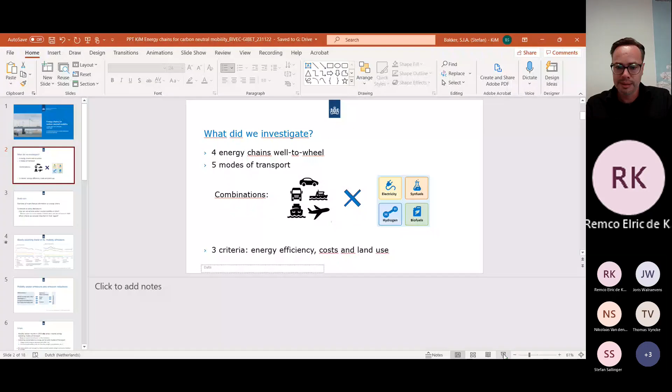We just tested how to share. Teams is a little bit new for me, so this is not the one that I want to share, I guess. So if you, yes, the presentation is there. Okay, is it perfectly visible? All right, that is fine. It's always a challenge. Online presenting is, of course, a very different experience.

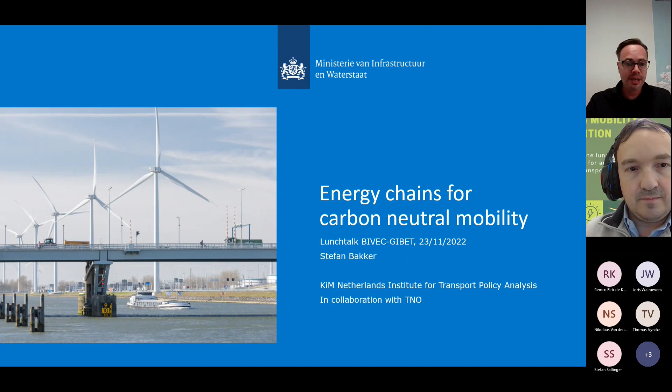But I'm happy to present some research we did in the past year together with my colleagues from the Netherlands Institute for Transport Policy Analysis. In Dutch, the abbreviation is KIM. This is an independent institute within the Ministry of Infrastructure and Water Management in the Netherlands, and we did this in collaboration with TNO. So this is quite a general, a very overview kind of research. We did it to really look into what are we talking about when we are looking at energy chains for mobility.

And we looked at 4 energy chains: electricity, synthetic fuels, hydrogen, and biofuels. And we included 5 modes of transport into that, and so also the combination of those energy chains with those 5 modes of transport. And then we looked at 3 criteria: energy efficiency, costs, and land use. And this is mostly for the Netherlands, but I think many of the results will be in a certain way also applicable to other countries.

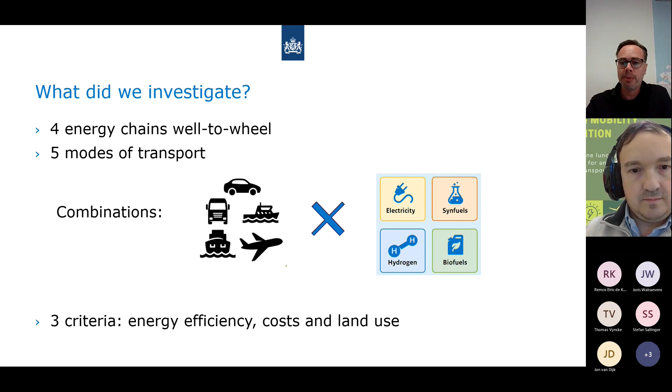The main aim of this study was to really look at recent information, really look at the facts, what is there in existing literature on the energy chains, and contribute, of course, to policy discussions, because the research that our institute does is always at the request of policymakers. So it's always directly relevant to policy. The ministry has a vision to work towards a mobility sector with 0 emissions in 2050. This is obviously a very big challenge. So we want to contribute to the question, how can we achieve this carbon neutral mobility on time?

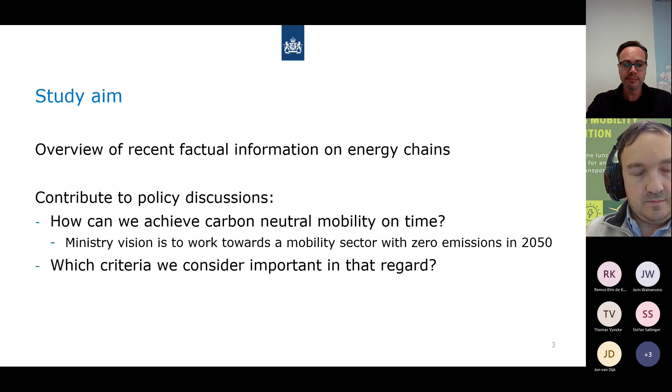And there are many ways to look at that. It's a very big energy transition, mobility transition question. And there are many choices to make in the next decade, or actually very soon. So to make those choices, what kind of criteria are important to consider when we look at this energy transition in mobility? A little bit of background.

The emissions of CO2 are slowly declining, but really only slowly in the past decade and a half, perhaps. On the left, you see the domestic mobility emissions, in which the personal cars are the biggest share, but also the freight sector, bestel- and vrachtauto's, for those who can understand that. The freight sector is also quite important, about 2/3 of the personal cars, private cars. But also, interestingly, mobile equipment is quite significant.

But if you look in a broader way, the Netherlands has a bit of an interesting position when it comes to international aviation and shipping. Rotterdam and the Schiphol airport are big bunker fuel stations, especially the Rotterdam port. So actually the emissions, if you calculate the emissions from the fuels that are bunkered for international aviation and shipping, are even higher than those of domestic emissions.

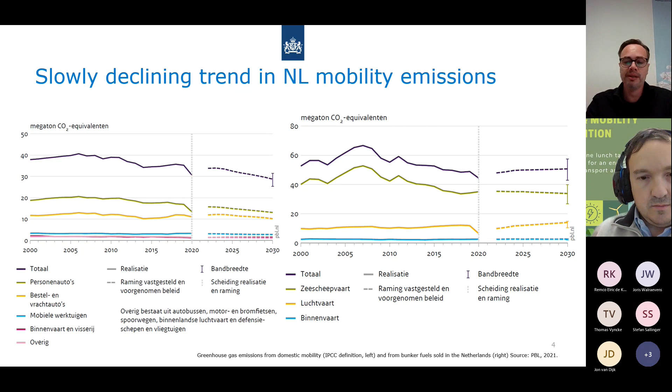These international emissions are not counted within the IPCC national accounting framework, but of course, if we want to go to a 1.5 degree scenario in the world, we have to look at international aviation and shipping as well. So therefore, we look at both domestic and international emissions from the fuel in the Netherlands, and both are very, very challenging.

One step back as well, as a framework to look at CO2 emissions in the transport sector. You can use the framework developed by Lee Schipper in the late 1990s. He described it in a way called the ASIF framework. So that is that the total emissions are the product of activity in person kilometers or ton kilometers, and then multiplied by the modal split, and then by the energy intensity, so the amount of energy per person or per ton kilometer, and finally the grams of CO2 per unit of energy.

If you look at those four parts, you can directly link those to policy options to reduce those emissions. And they can again be broken down into a framework developed in Germany in the late 1990s, but also recently taken up, becoming more popular also in the IPCC, called the Avoid, Shift, Improve framework. So Avoid looks at the activity, so the first factor of the ASIF framework, to have shorter trips or less trips, that sort of approaches.

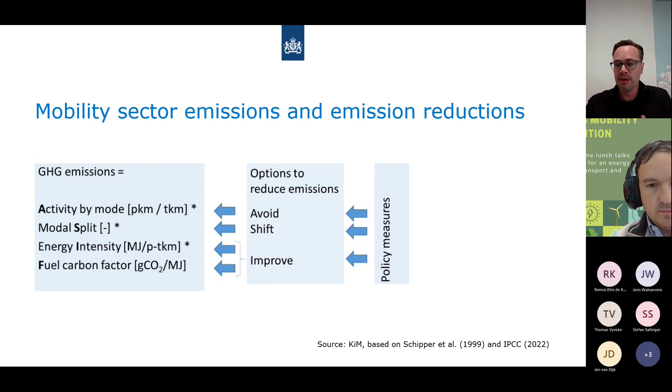Shift is to shift from one modal choice to another, so to a less energy and carbon intensive mode. And finally, the improve options, they look at only the individual modes and how can we improve the energy and carbon efficiency of that. And our study does not look at avoid and shift, only looks at the improve part. So that's a choice in the scope that we made. So in short, that means that we look at carbon neutral mobility in 2050 through carbon neutral energy chains.

The modes of transport, I didn't name them yet: the private cars and vans, we take them together. The heavy duty vehicles in road freight transport, then inland shipping, international shipping, and intercontinental aviation. So we chose those based on the total contribution to the CO2 emissions of domestic and international mobility in the Netherlands.

Then the scope can still be very large. There's many choices to make. So one thing we also did was we only considered those combinations of energy carrier and modes of transport that have a technology readiness level of 6 or more, which means that they need to be demonstrated at a large scale, at the full scale already. If they are less technologically developed, we did not consider them.

And another consideration is that they need to be practically applicable in the modes of transport. So, for instance, ammonia in road transport we did not consider. It's technically, of course, possible, but ammonia is toxic, and it's not very likely that that will happen in road transport. And for intercontinental aviation, we did not include battery electric or hydrogen, because the weight and the space of the battery or the hydrogen storage will be very, very challenging. So for short distances, this might be possible, but for intercontinental aviation, we consider this unlikely to happen.

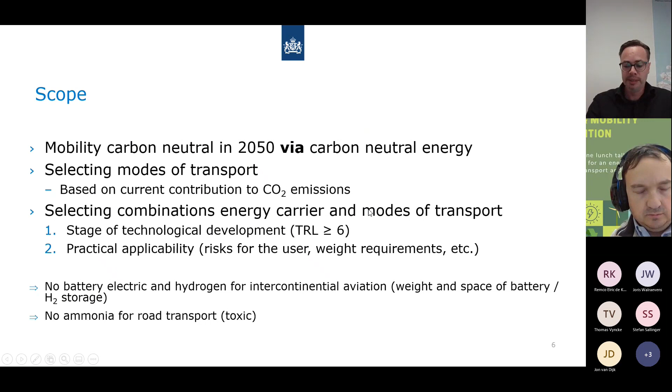One last remark about the scope. We want to explain the energy chain a little bit more in detail. We considered 4 steps. The first one is the production of the energy carrier, and also, if we talk about biofuels, it's not only the biofuel production, but also the biomass production, so the growing of the energy crops. The second stage is the transportation, the storage and the distribution of the energy carrier, so the fuel or the electricity or the hydrogen.

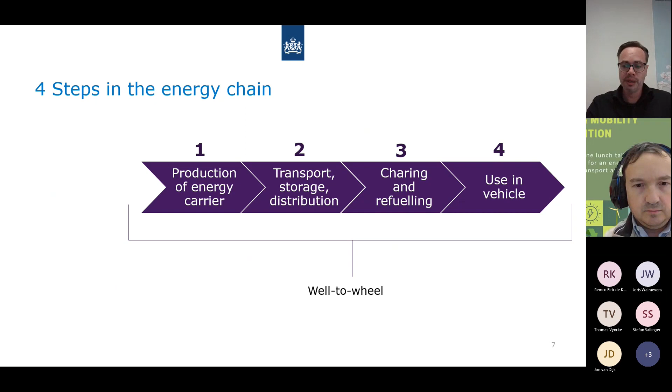The third step is the charging or the refueling of the vehicle or the vessel. And the last one is the use in the vehicle. So this is a full well-to-wheel approach. And what we did not do is a full life cycle analysis. So the production of the equipment, let's say, the production of a wind turbine or the production of a hydrogen tank, we did not include.

This is a very simple way to look at the energy chain. In reality, they are quite complex, as I will show in a bit as well. The energy chain can be quite long because energy is a global market, so they can be transported over long distances with many steps in between. They can also be bifurcated. So from certain types of biomass, you can choose to make like 4, 5, or 10 types of biofuels. So there are many subroutes in the energy chain. So we simplified them a little bit, but they're still quite complex.

They're also interlinked, and that I will show in the next slide. And of course, it's an obvious note to make, but we need to realize that mobility is only one of the energy consuming sectors. There will be competition with industry, buildings, the electricity sector. So we're looking at an energy for mobility landscape that is increasingly complex.

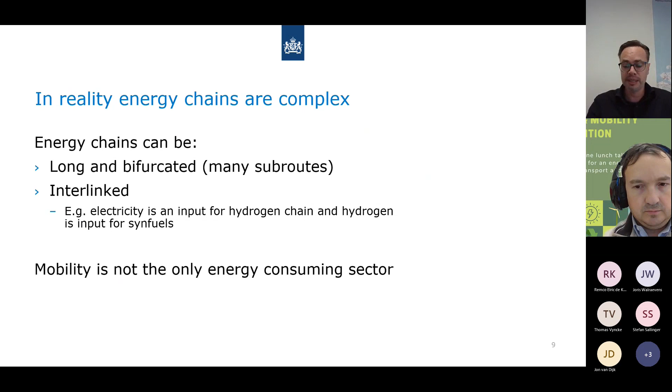To illustrate that a little bit, this is about half of the overview diagram that we use, and it's already getting a little bit interlinked. So electricity is, for instance, produced, we considered, from wind energy and solar energy. And it can obviously be directly used in vehicles, but it's also an input in green hydrogen production. And it's also used in significant amounts for the compression of the hydrogen that is already produced.

Another important note to make is that, for instance, CO2 is an input into the Fischer-Tropsch process, which is used to produce synthetic fuels. And maybe one more remark to make here is that if we look at the electricity chain on the top right, it can in the future maybe also work both ways. So you can use electricity to charge your electric vehicle, but the electric vehicle can also be used as a storage option, and be fed back into the grid when there are reasons to do so.

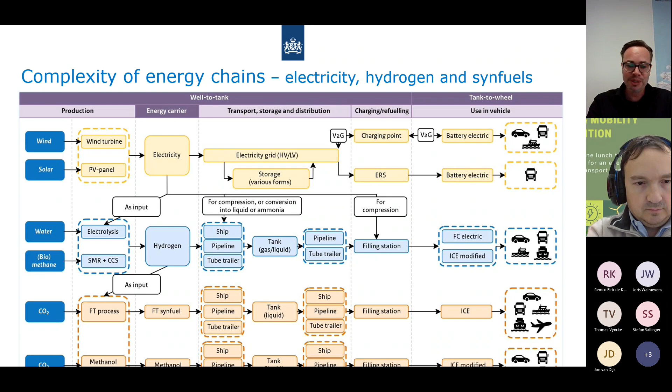When the vehicle is standing still and there is a demand in the electricity grid that can be met by these stationary batteries in the vehicles, then vehicle to grid can become a reality. So this is for illustration of three of the chains. The biofuel chain also is obviously part of it, but I will not show it here in the interest of time.

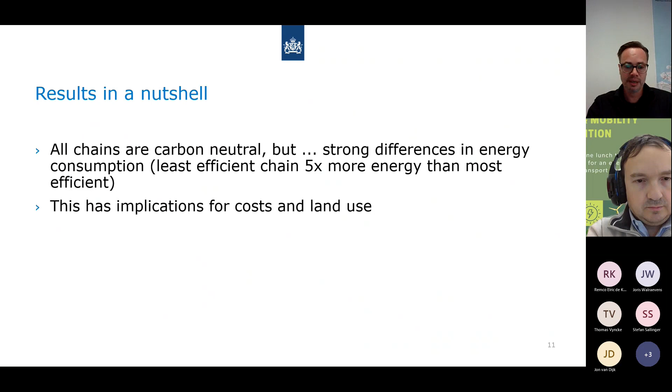Okay, so the final part is obviously the results. So in very brief, we can say all the four chains that we consider are carbon neutral or nearly carbon neutral, but there are very strong differences in the energy consumption, with the least efficient chain about 5 times more energy consuming than the most efficient chain. And this difference in energy efficiency has also strong implications for the costs and land use. And I will go into each of these three, energy, cost, and land use, in the next few slides.

So first of all, energy consumption. Here we show it in a relative way. So the most efficient chain is wind energy and a battery electric vehicle. So we consider that as a 1 and express the other chains relative to this chain. So you can see that for hydrogen, the energy consumption per kilometer will be at least twice as high, but it can also be 4 times as high, and in certain cases also more than 4 times.

The synthetic fuels. So here there are many synthetic fuels that we can consider, but for simplification, we only included the Fischer-Tropsch synthetic fuel produced with CO2 captured from the air. So that's DAC, direct air capture. And to produce that, you need even more energy than for the hydrogen chains, partially because you need hydrogen and CO2 to produce the synthetic fuel.

For biofuels, the chains are also a lot less efficient than for electricity. This is mainly because they will be used in vehicles with an internal combustion engine, basically like most of the vehicles are now, which are really inefficient compared to an electric motor, which is very efficient. And for bioethanol, there are many steps that you need in the process to produce that fuel. So also in the production process of bioethanol, a lot of energy is lost. I think this is the picture for energy efficiency.

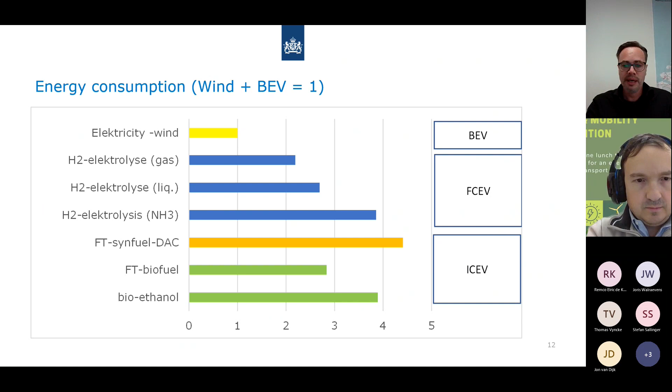And this will translate into costs to a large degree, but of course not one-to-one, which I'll explain right now. Here you can see the energy costs for the different types of fuels. The orange and the red bars, they are dominant in most of the chains. These are the material inputs that you need. So for instance, for the biofuels, the production of the biomass, and for the synthetic fuel, the costs of producing electricity and producing hydrogen. And for hydrogen, the costs of electricity. They are dominant in the biofuels and the synthetic fuels. But for hydrogen and for electricity, also the charging and the refueling steps are quite important.

Another thing that is very clear, I think, in this graph, we included uncertainty bars, the small bars, and they are quite large. So even for 2030, which is not too far in the distant future, the costs are very uncertain. And these are costs without taxes and subsidies. These are the basic costs. And of course, we can see in the markets recently that it is also very difficult to predict these costs.

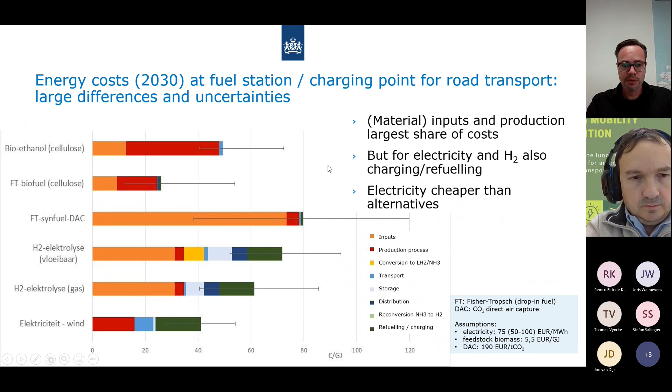But that's an important notion, that the costs are quite uncertain. So these are for energy distributed at the fuel station and the charging points for road transport only. And this will translate into total costs. We express it by kilometer, so kilometer by road, for passenger cars and for heavy-duty vehicles.

For passenger cars, the investment costs in the vehicle are the most important for most of the energy chains, especially for fossil fuel and for electricity. The energy costs are really just a relatively small part of the total costs. But for heavy-duty vehicles, it's the other way around. Heavy-duty vehicles of course have a mileage per year about 5 times that of a passenger car, and obviously they're also a lot heavier. So the investment costs for heavy-duty vehicles are a relatively small part of the total costs.

But the picture for both passenger cars and for heavy-duty is that battery electric vehicles are likely the most economically advantageous option. Although for biofuels there is a very big uncertainty in the costs. So it might be that biofuels can also compete with electricity. The other fuels, like hydrogen and synthetic fuels, are likely to be more expensive per kilometer. But again, just to highlight, the uncertainties are quite considerable. Even though we did not include them here, they are large.

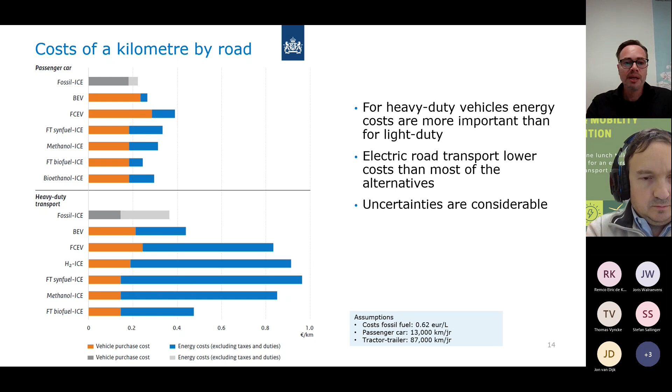So that's the cost. The third criterion that we looked at was the land use, so the space requirements to produce and to transport the fuel. This is something that we did not see addressed a lot in existing literature. So we hope that this is also a contribution to policy, but also maybe to academic discussions.

And we expressed it here as how much land or sea surface you need for the energy supply of one passenger car. So again, electricity is energy-wise the most efficient chain. So it also has the lowest land use, but it's still very significant. We used the Dutch electricity mix included in a few climate neutral scenarios for 2050. In those scenarios, the electricity mix is about 90% wind and solar, and 10% can be other backup electricity, and out of that 90%, 3/4 is wind and 1/4 is solar. That's the basis we used here.

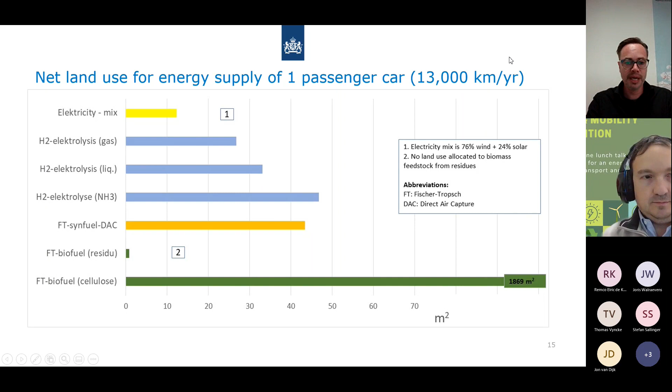So this was the net land use. Like I said in the previous slide, the space between the turbines is not included. But obviously, we need to build those wind farms. So we also did some calculations on how it would look if we build the wind farms that are needed to produce electricity for mobility.

In the first scenario, we looked at only road transport: if you take all current road transport, so heavy-duty vehicles, vans, buses, and passenger cars, and make those electric, what surface area of wind turbines do we need? It turns out we need about the surface area of the province of Utrecht to produce enough electricity. Of course, you can also do it by solar, and then the surface area will be much less. But wind energy will be dominant in the future electricity mix, so that's why we use that as a basis.

On land, it might be difficult to do that. Of course, we can also translate this surface area into the area you need for offshore wind. And then it should be manageable in the Dutch situation, although still challenging perhaps. But that is only road transport.

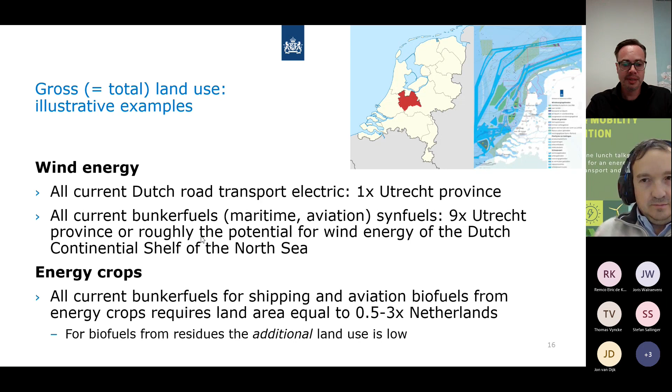Okay. These were the three main aspects that we look at: efficiency, costs, and land use. But there are many other things to consider when we look at energy chains. So we have a few examples here. For electricity, which means that it's also partially relevant to hydrogen and synthetic fuels, a few of the barriers are the availability of materials, so rare earth materials and metals like cobalt, nickel, and lithium, but also, for instance, copper. We need a lot of copper for the whole energy transition.

Recycling, especially of the batteries in electric vehicles, is a big challenge. Steps are being made, but we're very far off 100% recycling of batteries. In the energy transition as a whole, electricity will play a very big role, one way or the other. And to accommodate this, the electricity grid needs to be expanded and also reinforced. Some reports in the Netherlands say that we need 4 times as much investment in the next 2 or 3 decades than we have invested in the past decades. And apart from money, it needs to be done too. So you need skilled technicians, and there is a significant lack of these. So there's also a technical capacity issue.

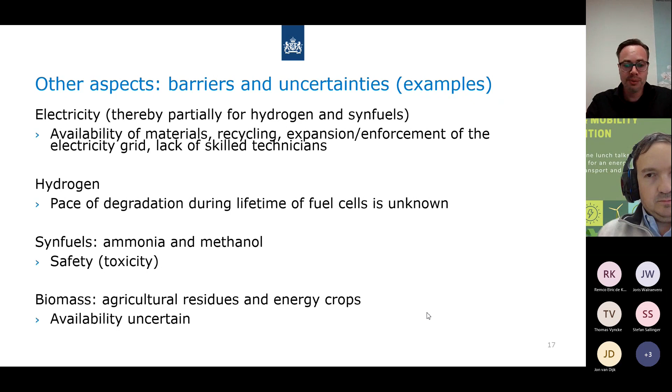So to conclude, out of the 4 carbon neutral energy chains that we considered, the one based on electricity is the most energy efficient, and the electricity chain, for road transport at least, is also likely to be the lowest cost option. Although we have to say that uncertainties are quite substantial.

One important aspect to look at, I think our report has shown that, is the land and availability of surface on land and at sea to produce the different energy carriers. So the land required or the sea area required is substantial. So this is something that needs attention, especially in policy circles. It will not be the same for every country.

For the Netherlands, this is definitely a very big issue, especially because we can see that for carbon neutral bunker fuels, it is very simple. It's not possible to do that domestically. If we would do that, it means there is no carbon neutral energy for other sectors available. So energy imports will be required for sure for the bunker fuels.

And then in general, in the energy transition in the mobility sector, there will be a certain dynamic in international and global markets. So imports are going to be part of the puzzle when we look at energy in carbon neutral mobility.

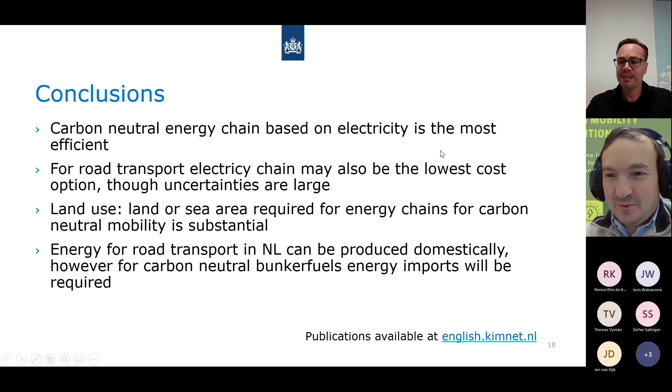Maybe I can start with a delicate question, a question of the devil's advocate. From your study, can I conclude that either we need other energy sources than the ones typically considered, or that we need to increase the dependency on other partners, on other countries, to be able to make the energy transition?

Thank you. That's of course a very interesting and important question. I think there will be many debates about that. There are many criteria to consider when we look at energy for mobility. And for the different modes, these questions might also be slightly different. I think in road transport, for sure private cars, but also in heavy duty vehicles, at least in Europe, there is a trend towards electric mobility. Be it via fuel cells for heavy duty vehicles or not, but that's an electricity question.